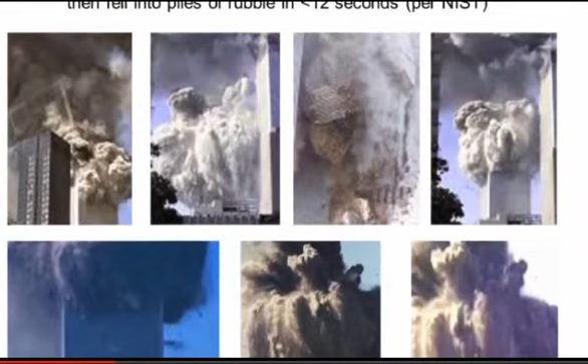We can see from these photos that the towers appeared to have exploded, starting at the top and then going all the way down. Also, high-velocity bursts of debris shot out from 10 to 30 floors below the collapsed front. At the top of each tower, the debris appeared to shoot upward and outward as much of the solid structure turned to dust. This is counterintuitive to the idea that the building was being crushed downward. Some large steel column assemblies were shot outward for hundreds of feet.

Many of us have asked ourselves, is this what it looks like when a building is softened or weakened from fire? NIST made the point that in no instance did they report that steel in the World Trade Center towers melted due to the fires.

The melting point of steel is about 1,500 degrees Celsius. Normal building fires and hydrocarbon fires generate temperatures much lower than that. NIST reported maximum upper layer air temperatures of only about 1,000 degrees Celsius. In other words, diffuse hydrocarbon fires such as these cannot produce temperatures high enough to melt steel.

Unfortunately, many prominent media and political figures have suggested that very thing and continue to do so.

The fire resistance of tall buildings like those at the World Trade Center is ensured through testing of samples prior to construction. My former employer, Underwriters Laboratories, tested and certified the fireproofing used in the World Trade Center towers, as seen in this quote from the company that manufactured the fireproofing.

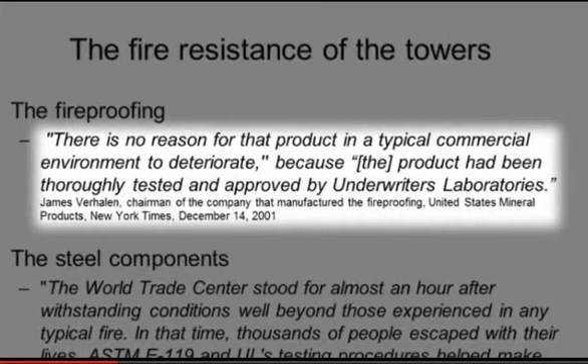UL tested the steel components used in the World Trade Center towers to meet the 1968 New York City Fire Code. That meant that the column assemblies had to withstand 3 hours of intense fire, and the floor assemblies had to withstand 2 hours of intense fire in a test furnace. And of course, the biggest problem with this is that one of the towers failed in 56 minutes.

Here's the fellow that told me about this testing, Loring Knoblauch, who was the CEO when I worked there. He later wrote to me and a few others saying, "We tested the steel with all the required fireproofing on it, and it did beautifully."

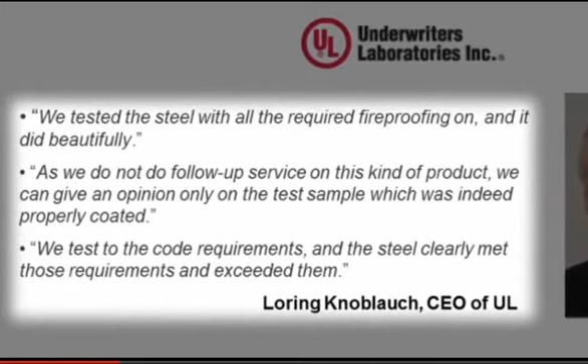"As we do not do follow-up service on this kind of product, we can give only an opinion on the test sample, which was indeed properly coated, and we test to the code requirements, and the steel clearly met those requirements and exceeded them." UL later participated in the NIST World Trade Center investigation, which was a clear conflict of interest.

A question NIST tried to answer was, how could the World Trade Center towers collapse in only 11 seconds and 9 seconds, speeds that approximate that of a ball dropped from a similar height in a vacuum?

We independent investigators agree that the buildings came down essentially in free fall, and this is an important starting point. This violates 2 fundamental laws of physics, one being the law of conservation of momentum, and another being the law of conservation of energy.

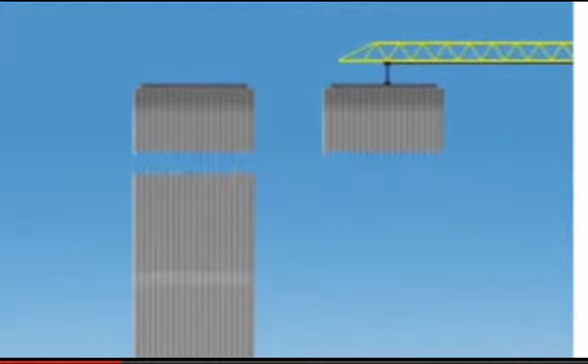The first law means that hundreds of thousands of tons of material in the cold lower section should have slowed the upper part of the building simply due to the mass of the lower section. The second law requires that deformation of the lower section would consume energy, slowing the fall even more.

Another point of agreement among all parties is that the theory that was claimed to be the most probable root cause for many years, called the pancake theory, in which the floors pancake down upon each other, is no longer supported by NIST. It's really no longer supported by anyone.

Since 2004, when my former company did test models of the floor assemblies, the pancake theory has no longer been viable. The NIST World Trade Center report is over 10,000 pages. It was originally published only for the towers in 2005, and like previous reports on the subject, it was focused only on the fire-induced collapse hypothesis.

NIST made no real effort to examine the explosive demolition hypothesis. NIST's stated goals were to explain why and how World Trade Center buildings 1 and 2 collapsed after the initial impact of the aircraft, and why and how World Trade Center building 7 collapsed.

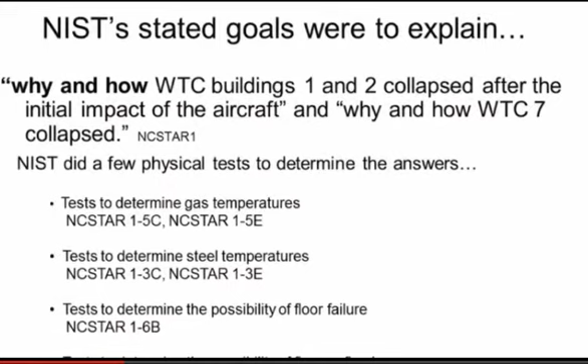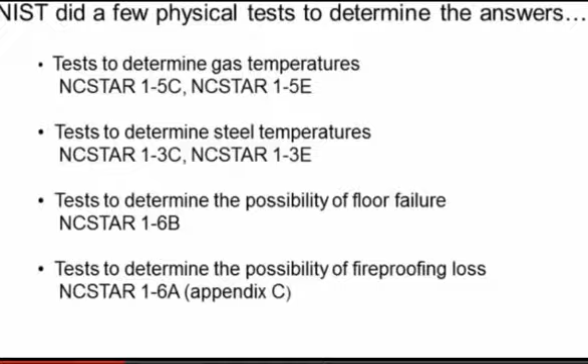The scientific tests that NIST performed to reach its conclusions included tests to determine gas temperatures, steel temperatures, the possibility of floor failure, and the possibility of fireproofing loss. Unfortunately for NIST, none of the tests it performed supported its conclusions, as we will see.

NIST therefore based its entire explanation on computer models. A summary of what NIST found was as follows.

The aircraft severed columns, loads were redistributed, fireproofing was widely dislodged, high temperatures weakened columns and floors, floors began to sag, sagging floors pulled exterior columns inward, causing them to buckle. Instability spread around the entire building, and then they simply said global collapse ensued.

We'll examine each of these steps. The first step in this sequence was that columns were severed. Again, it's agreed that the core columns were massive and over-designed, and the perimeter columns were made of super strong steel. But NIST now admits that 14 to 15% of the columns were severed in the World Trade Center towers.

This is compared to original design claims published in the Engineering News Record when the buildings were first announced. They said that one could cut away all the first-story columns on one side of the building and part way from the corners of the perpendicular sides, and the building could still withstand design live loads and a 100-mile-per-hour wind from any direction. What that means, in essence, is that the towers could lose 25% of their columns, and they'd only lost 14 to 15%.

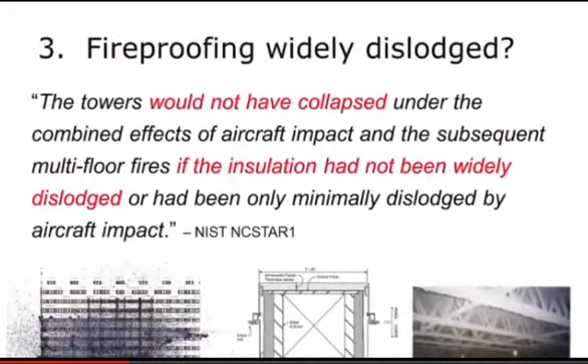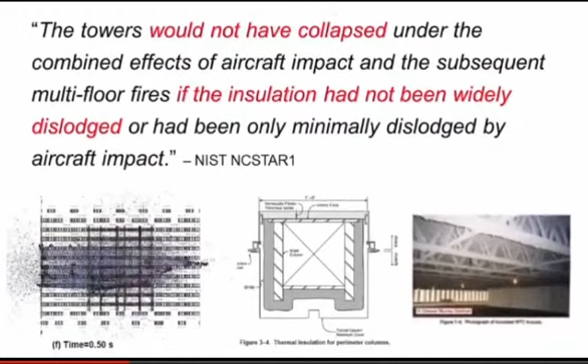The third, very critical step in this sequence was that fireproofing was, quote, widely dislodged. NIST said the towers would not have collapsed under the combined effects of aircraft impact and the subsequent multi-floor fires if the insulation had not been widely dislodged, or had been only minimally dislodged, by aircraft impact.

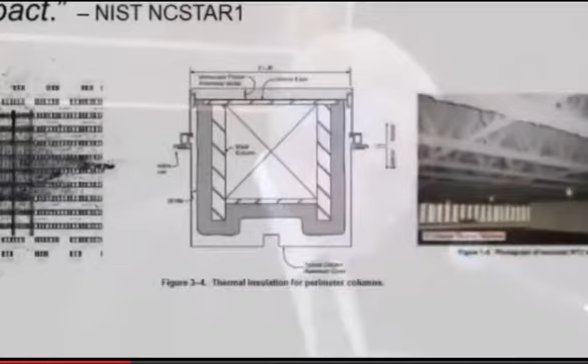As said before, the steel structure was covered with a spray-applied fireproofing material. There were requirements for the fireproofing to have a certain bond strength, and those requirements were met. In the center and right photo below, you can see how the fireproofing was applied to the columns and underneath the floor assemblies. The test that NIST performed to establish the critical fireproofing loss involved a total of 15 rounds from a shotgun at steel plates and bars.

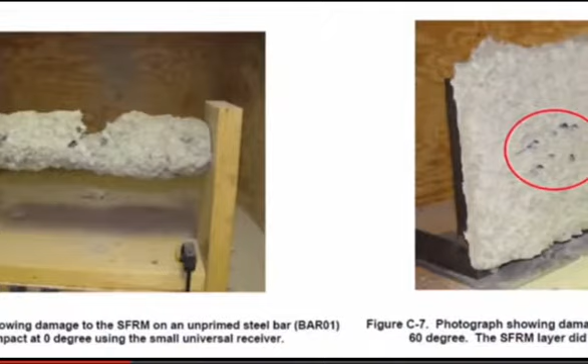Here you can see photos from the NIST report of the results of these tests. But NIST did not explain how a Boeing 767 airliner could be converted into many thousands of shotgun blasts, which would need to be pointed in all directions to shear off the fireproofing.

A real serious problem with this is NIST provided to us the energy requirements, and too much energy is required for this. Previous calculations by engineers at MIT had shown that all the kinetic energy available from the aircraft impact was consumed in breaking the columns, crushing the floors, destroying the aircraft. And NIST had tests that showed that 1 megajoule was required for every square meter of surface to shear off the fireproofing via this shotgun blast effect.

That's more than 6,000 square meters of column, floor deck, and floor joist surface, according to the NIST report. That would be several times more than the entire kinetic energy available from the aircraft impact.

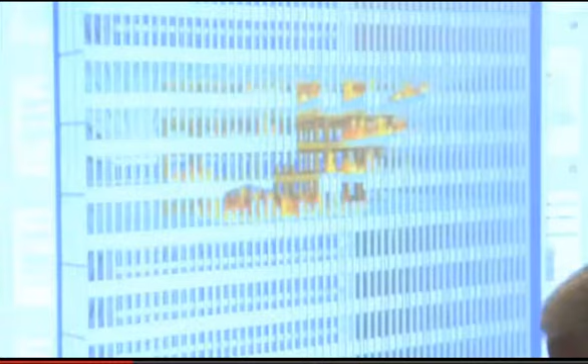The plane hit the building, fires rose up. NIST says the fires died down. Explosions do that - they consume the oxygen. And then over time, the fires rose up again and began migrating around the core of the building. It took a whole hour for that to happen, leaving 45 minutes of fire time at the south wall.

NIST claimed that the south wall bowed inward from the fires there, but we might ask why the east and west walls, which had seen as much fire time, didn't show any bowing.

My former company, UL, participated in the NIST investigation by conducting tests on models of World Trade Center floor assemblies to examine the floor response to fire. The result was only very slight sagging occurred in the tests, and no collapse.

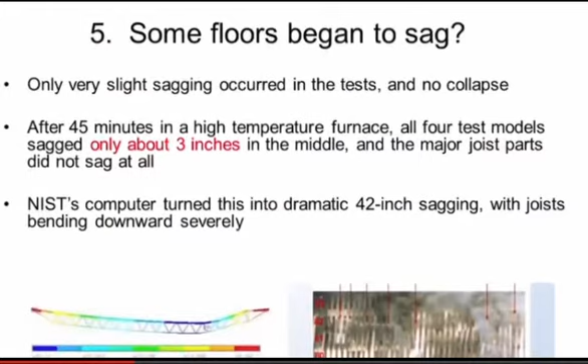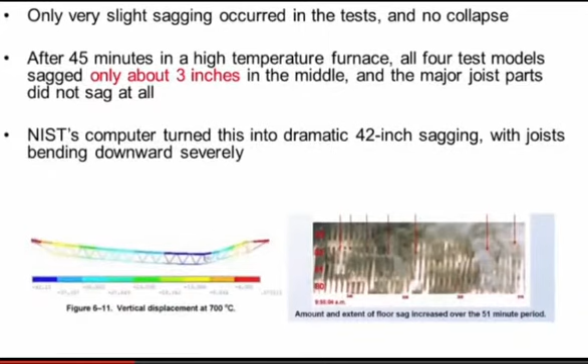After 45 minutes in a high-temperature furnace, all 4 test models sagged only about 3 inches in the middle, and the major joist parts did not sag at all. NIST's computer model turned this into 42 inches of sagging, with the joist bending down severely.

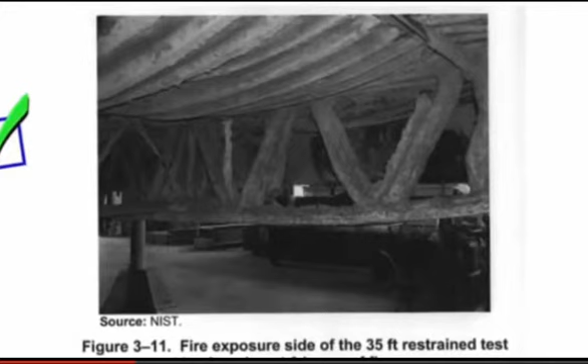Here's a photo of one of those floor assemblies after the standard method ASTM E119 was performed. During this test, it was held in a furnace at a temperature over 1,000 degrees Celsius for a period of 2 hours. You can see the slight effect.

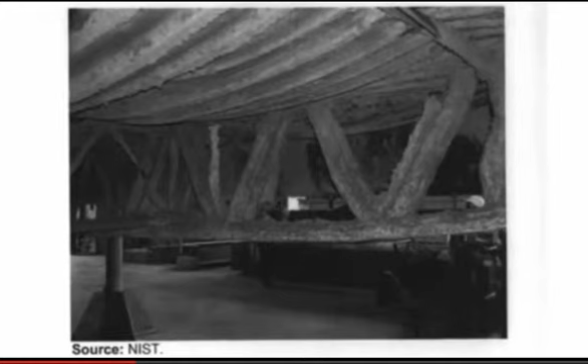The midsections of the assembly sagged a few inches, but the frame was not damaged and the floor held its load without failure. The weight loaded was twice as great as what was known to have existed in the World Trade Center. These experiments were performed on 4 separate floor models, all of which had less fireproofing than was known to have existed in the World Trade Center on September 11th.

If the sagging had been severe, as in the computer model, what would have to happen to make the sagging floors create these dramatic pull-in forces as NIST requires? Sagging floors, for one thing, do not weigh any more than unsagged floors.

But to defeat the original design claims, over 30 columns would have to be pulled in, and the floors were known to form this intense staggered grid with the columns, the way it was constructed. And the force required to pull a perimeter column inward within that grid and overcome that was far greater than what a sagging floor assembly could provide.

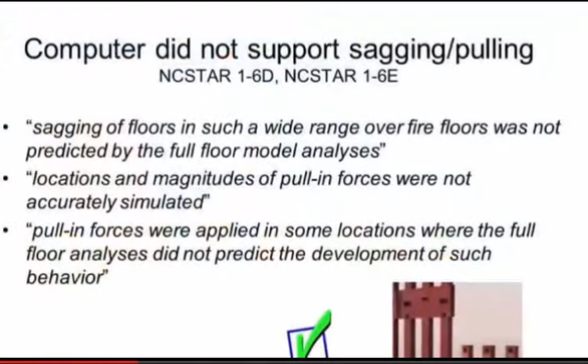Even within NIST computer models, the sagging and pulling effects that NIST's explanation depends on were not seen, not even for the most severe cases examined. Here are several quotes from the NIST report that make that fact clear.

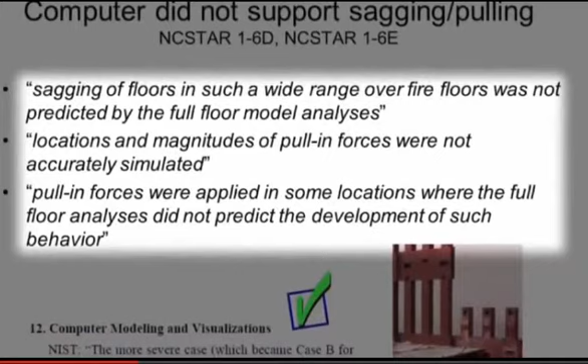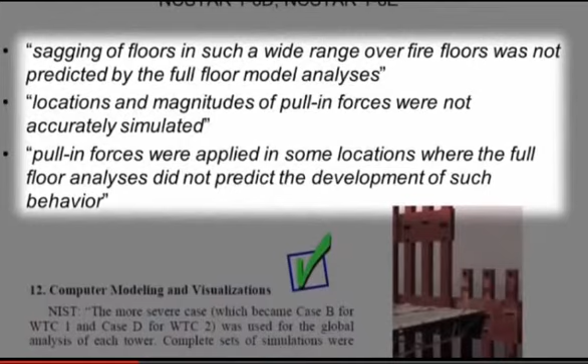Sagging of floors in such a wide range over fire floors was not predicted by full floor model analysis. Locations and magnitudes of pull-in forces were not accurately simulated. Pull-in forces were applied in some locations where the full floor analyses did not predict the development of such behavior.

NIST was simply not able to demonstrate this critical pull-in effect. Physical tests were not done, although that would have been decisive. The computer models did not indicate these forces either.

As a result, NIST made some fraudulent changes to the scenario. All the fireproofing was stripped off a large section of the computer-modeled building, and exaggerated temperatures were applied for twice as long as NIST had said occurred in the failure zones—that is, for 90 minutes instead of 45 minutes.

But even then, the pull-in forces were not created in the computer. So NIST did something completely paradoxical: it disconnected the floors before applying an imaginary pull-in force. This is the opposite of science. This is not anywhere near science.

No physical test was done. The computer models did not give them the answer they wanted, so they did something completely fraudulent, which is exactly what they did.

The final step of the NIST sequence for the towers was that instability caused by the perimeter columns pulling inward spread around the entire perimeter of the building. This would be necessary to explain the perfectly uniform fall.

Again, no tests of any kind were performed to confirm this instability spread. And for several reasons, it does not appear to be realistic.